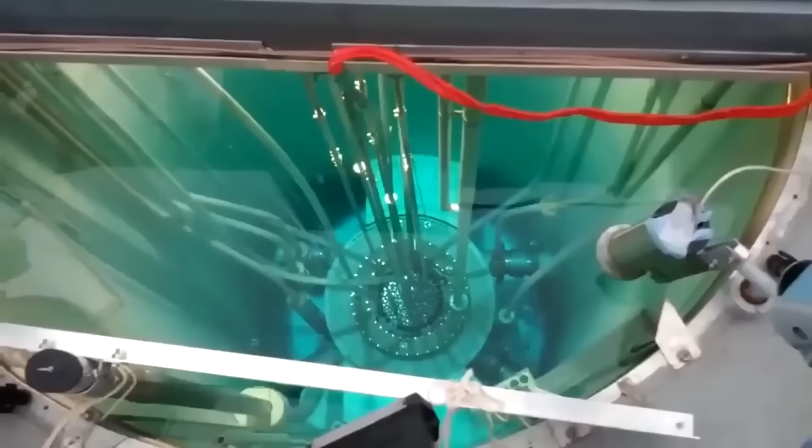Germany, a nation known for its groundbreaking technological feats, is now at the forefront of a nuclear revolution that could completely change the future of our entire planet.

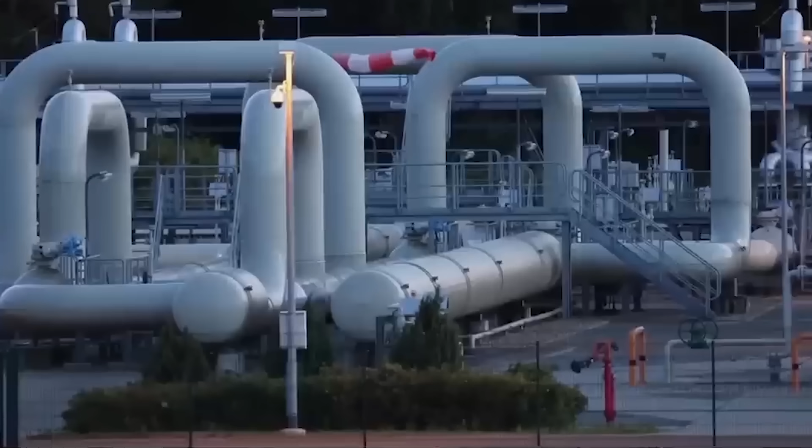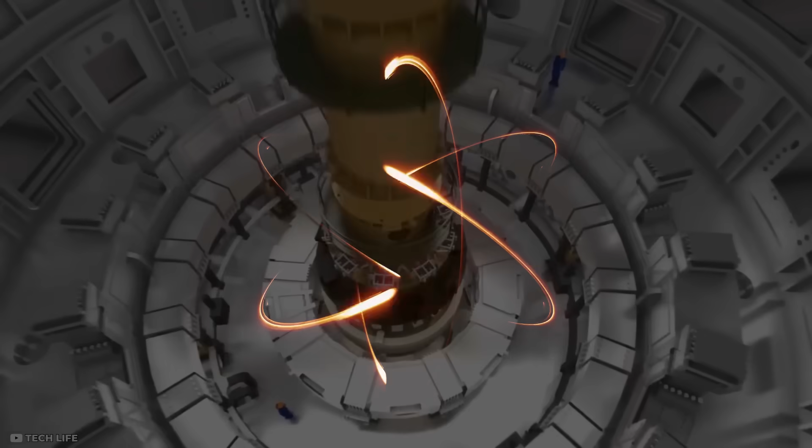The fact that Germany was the first country to abandon nuclear energy has led to an unexpected yet enlightening outcome. The ongoing war in Ukraine and sanctions against cheap Russian gas have pushed the country into a severe energy crisis, posing challenges to the country's economy and calling into question its nuclear phase-out. However, though Germany is phasing out nuclear power, the nation is still leading in nuclear technologies. And now it is witnessing the dawn of next-gen nuclear technologies with its latest Thorium Reactor breakthrough.

Introducing the Dual Fluid Reactor, a groundbreaking new thorium molten salt reactor design that is game-changing for several reasons. While traditional nuclear plants use more than 50-year-old technology based on uranium, the next generation of nuclear reactors is harnessing thorium, an element much more powerful and abundant than uranium. With only 1 ton of thorium, it is possible to generate the same amount of energy as 200 tons of uranium, and a dangerous meltdown is physically impossible.

But what makes this new reactor truly amazing is the fact that it can burn nuclear waste. And by untapping this resource and commercializing nuclear waste, this new thorium molten salt reactor could supply our entire world with clean and safe nuclear energy for up to 1,000 years.

So what is this new reactor all about? How does it work? And what does it mean for the future of our planet? We have everything you need to know covered in this video.

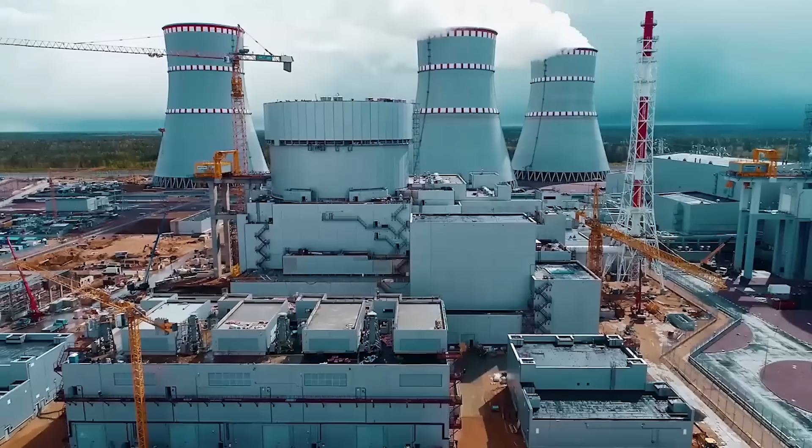Germany was once home to the most powerful and efficient nuclear reactors. However, the risk of a nuclear meltdown, as well as the repository problem of nuclear waste, led the country to shut down its last active reactors.

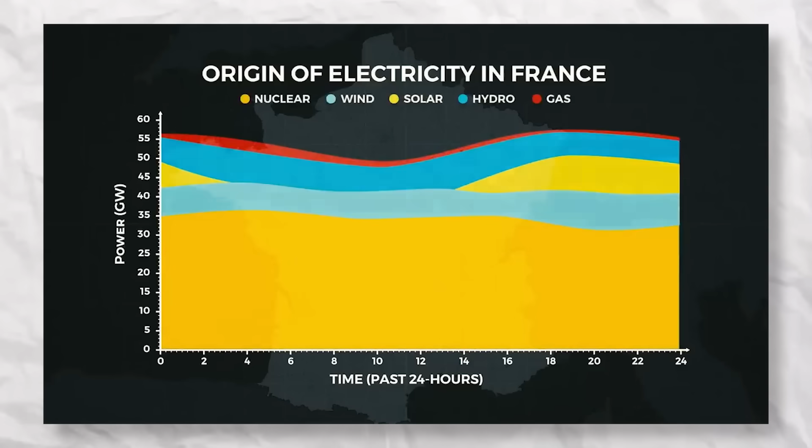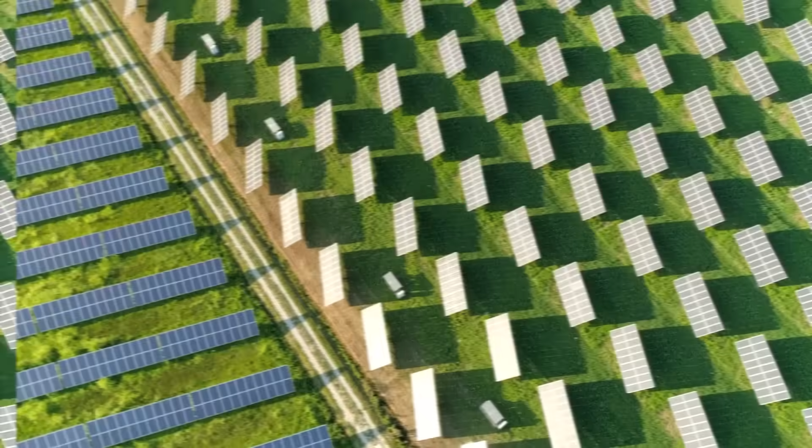But the sanctions against Russian gas, and ironically, the decision of Germany's Green Party, has resulted in the country putting coal-fired power plants, the most polluting fossil fuel source, back into operation. Additionally, Germany now had to rely on energy imports from neighboring countries like France, which generates over 60% of its energy from nuclear power. So while Germany was still dependent on nuclear power, its economy began to crumble due to expensive energy imports. This is a perfect example that a baseload-capable renewable energy grid is not possible with solar and wind alone. Fortunately, the next generation of nuclear reactors are an excellent option for safe and clean nuclear power supply.

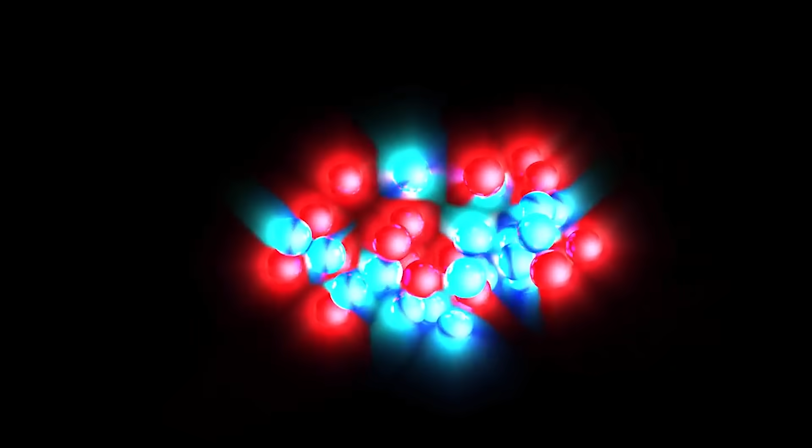So how does the Dual Fluid Reactor work? Traditional nuclear plants work through nuclear fission, where uranium atoms are bombarded with neutrons, causing them to split and release tremendous amounts of energy, leading to a chain reaction in the fission process. Continued release of energy heats water, creating steam that drives turbines to generate electricity.

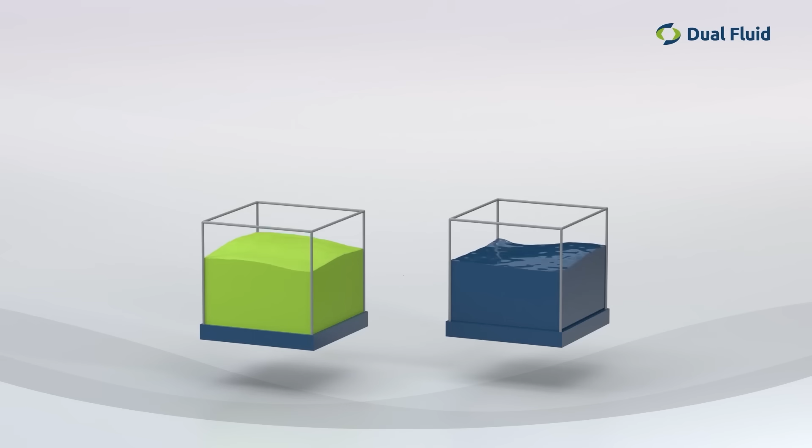But while traditional nuclear plants use solid materials as fuel rods, the fuel is dissolved in a molten salt mixture for use in a dual fluid reactor. Dual fluid means 2 fluids form the plant's core. One contains the fuel, and the other acts as a coolant.

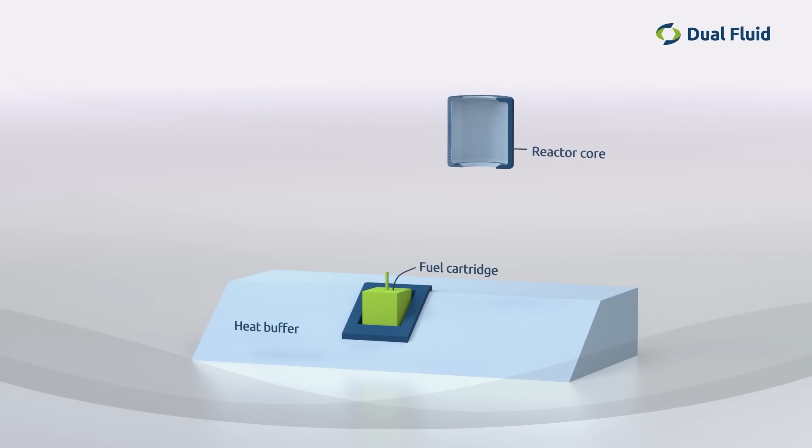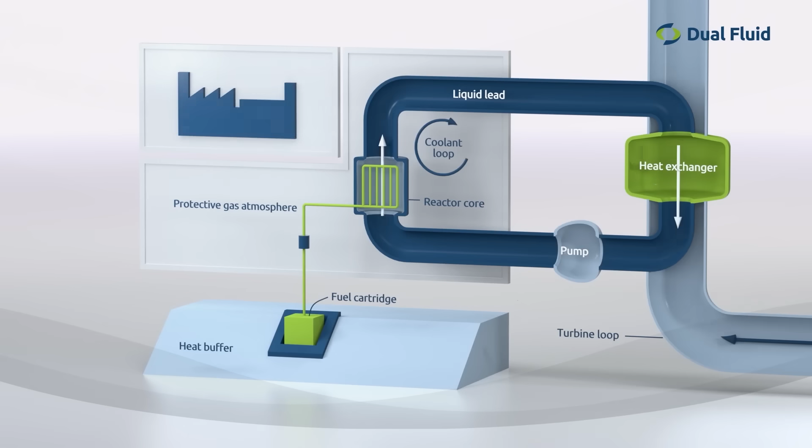Any fissile materials can be used as fuel, from conventional materials like uranium to thorium, and even nuclear waste. The liquefied fuel is delivered to the power station in a sealed cartridge. It is then heated and pumped into the reactor, generating even more energy as the fission process begins. The liquid lead flows in an entirely separate chamber close to the reactor core to extract the heat efficiently. The lead then carries the heat to a separated turbine loop to exchange heat again for the energy generation process.

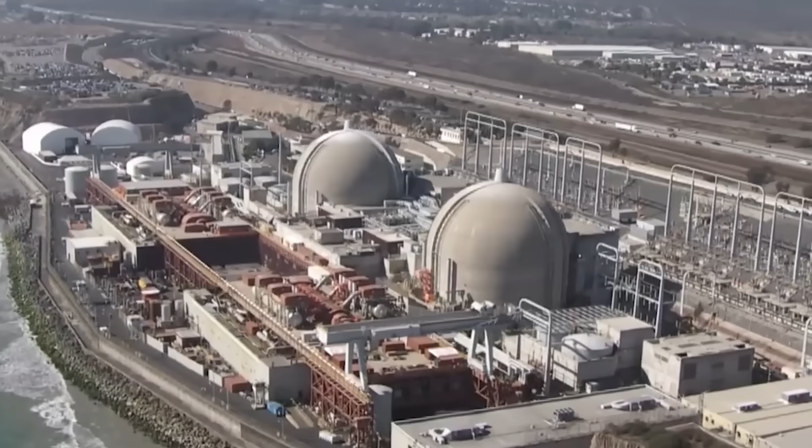So the dual fluid reactor can not only harness thorium, which is 3 to 4 times more abundant than uranium, but it can also turn nuclear waste into electricity, which is groundbreaking for several reasons. The main reason is that current nuclear plants produce high-level nuclear waste, which remains radioactive and hazardous for more than 100,000 years and has to be disposed of properly.

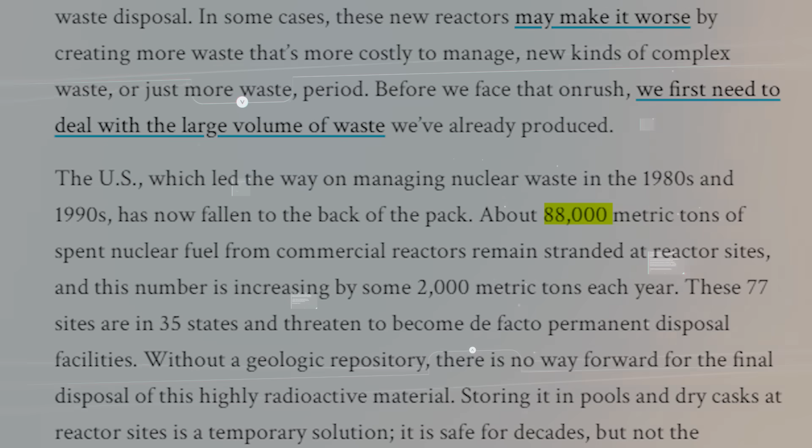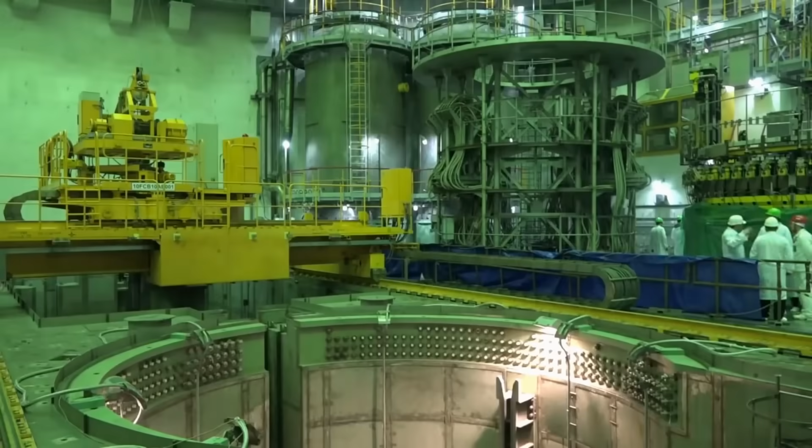In 2023, the United States accumulated about 88,000 metric tons of highly radioactive waste. As there are still no plans for managing and disposing of spent nuclear fuel, the nuclear waste is piling up in those plants, leading to a huge safety problem. However, by utilizing nuclear waste as a resource instead of managing its disposal, this new technology could supply the United States for up to 1,000 years with cheap, clean nuclear energy.

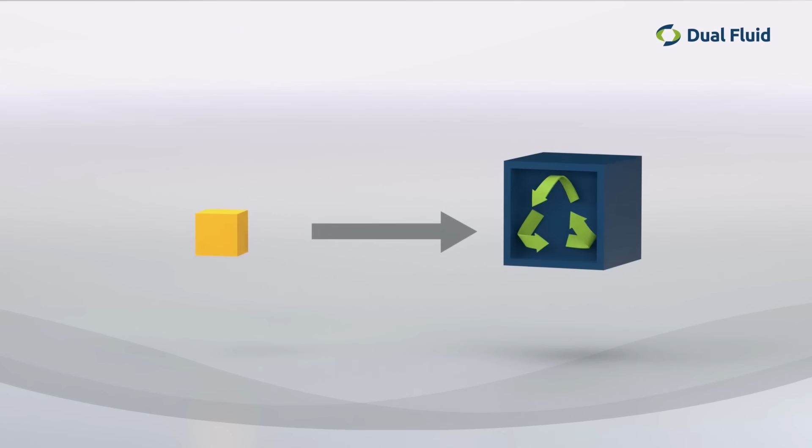And that wasn't even all. According to the company, the liquefied fuel can operate for about 25 years. But at the end of the burning cycle, the spent fuel is transported to a recycling facility, where still fissionable materials are returned to the reactor to be burned again, significantly increasing fuel efficiency. The residual radioactive materials become less harmful than natural uranium in 300 years.

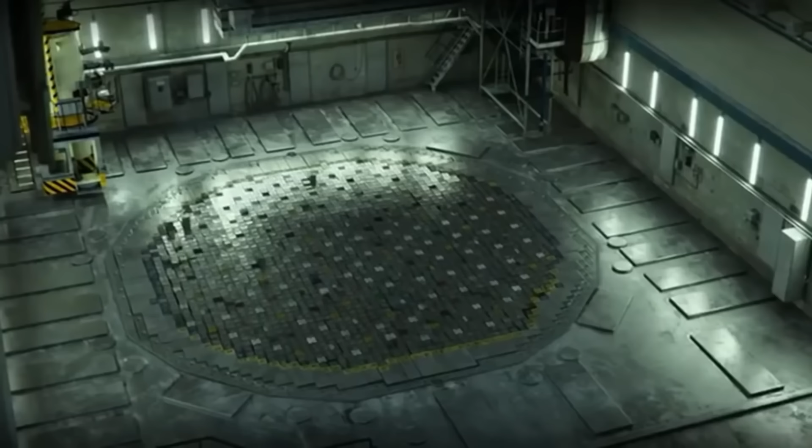Furthermore, the new reactor is considered extremely safe, and catastrophic meltdown situations like Chernobyl and Fukushima are physically impossible. The reactor can never overheat, as the laws of nature work in its favor. If the temperature increases, the liquid fuel expands. As a result, the reactivity of the fission process automatically decreases, creating a self-regulating feedback loop.

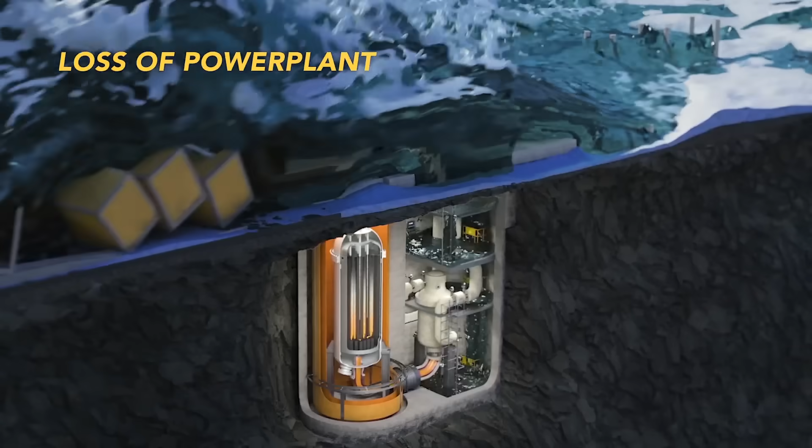An additional safety feature enables using this reactor even in hazardous regions such as earthquake or tsunami areas, typically unsuitable for nuclear power plants. There's a melting fuse plug at the bottom. If the reactor overheats, the plug melts, and the liquid fuel drains into a separate passive cooling tank where the nuclear chain reaction stops immediately.

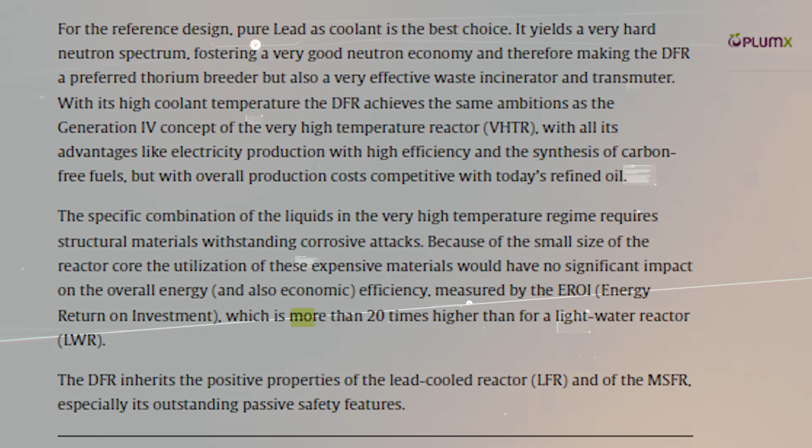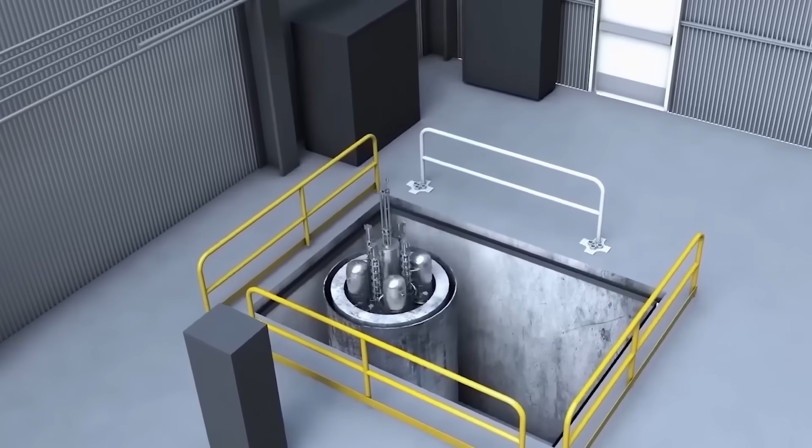According to the company, the Dual Fluid Reactor is incredibly efficient and delivers up to 20 times more energy than current nuclear reactors. Unlike traditional nuclear plants, which can take up huge spaces and take decades to build, the Dual Fluid is also designed as a small modular reactor, making it much more scalable and affordable. Just one of these reactors can power 500,000 homes, while several small reactor cores can be used to replace a large power station. With this new thorium reactor, German engineers have marked a major milestone for the next generation of nuclear technologies.

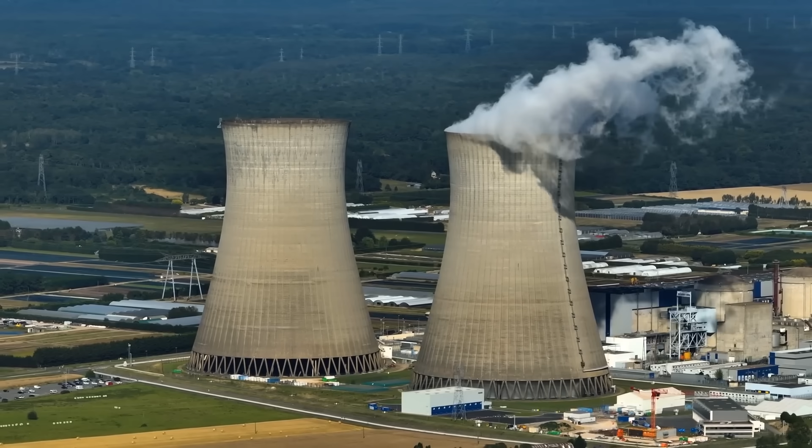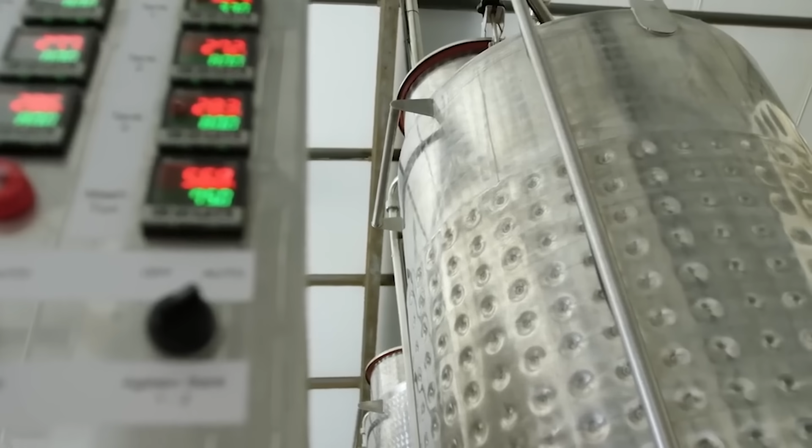I know what you're thinking. It sounds way too good to be true. So what's the catch of the story? Currently, the system is just a concept that has gone through many preliminary studies, but component tests have proven its feasibility. The plan is to develop the first test reactor by 2026. The prototype is scheduled to follow in 2029. And mass production is scheduled to begin by 2034.

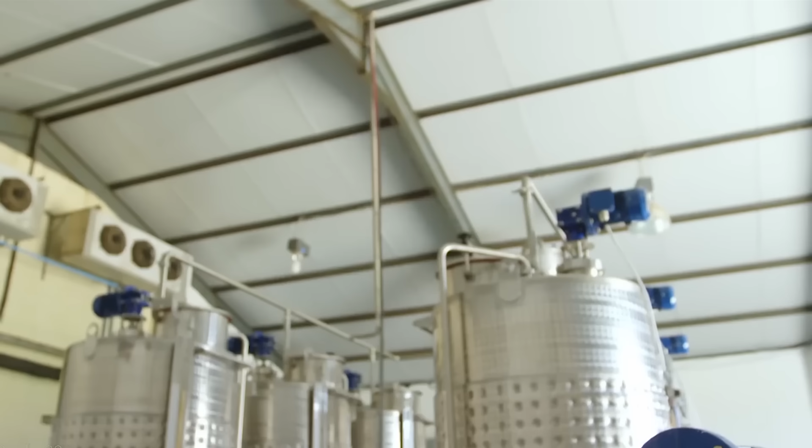So in less than 2 years, we will know whether the system works.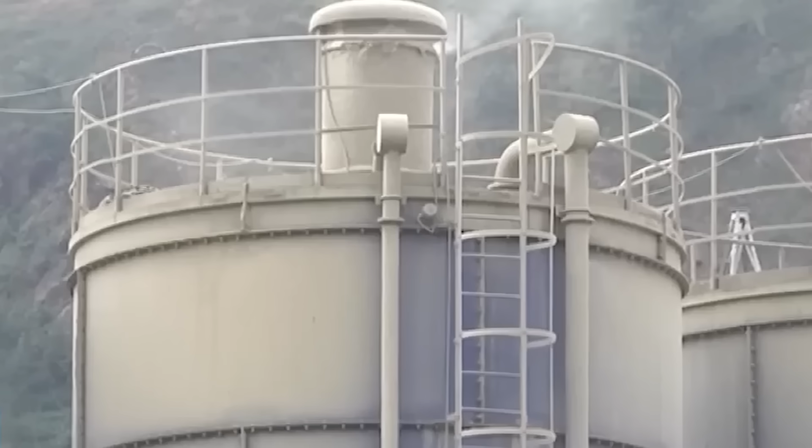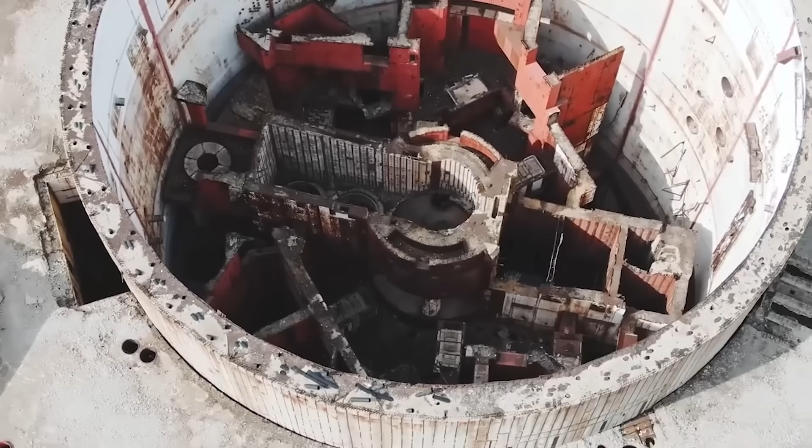Interestingly enough, the first test reactor will not be built in Germany, but in Rwanda. Bureaucratic hurdles and a lack of government funding are hindering the development of such innovations. However, innovations like the Dual Fluid Reactor are inevitable. That's because the importance of clean, carbon-neutral energy is significantly increasing in the global economy, while many existing nuclear power plants are reaching the end of their designed operational life. Updating, maintaining, or decommissioning these aging reactors presents technical, economic, and environmental challenges.

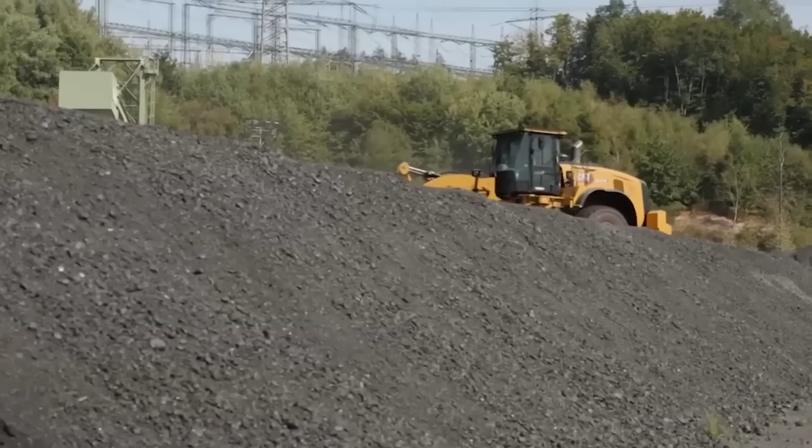Furthermore, conflicts like the Russian-Ukraine war led to a massive surge in energy prices and showcased European nations' reliance on Russian energy. The Dual Fluid Reactor would be a perfect alternative to decouple from Russian gas. It is a carbon-free energy source that is in high demand and a safe and clean alternative to conventional nuclear power plants. The success of this reactor could be revolutionary for the energy industry.

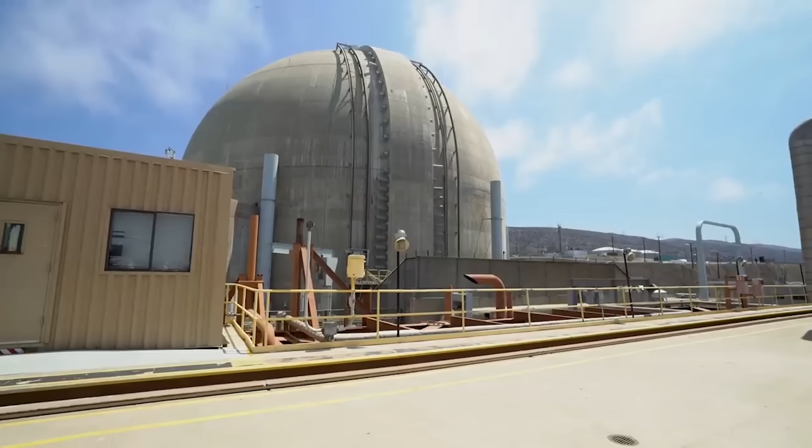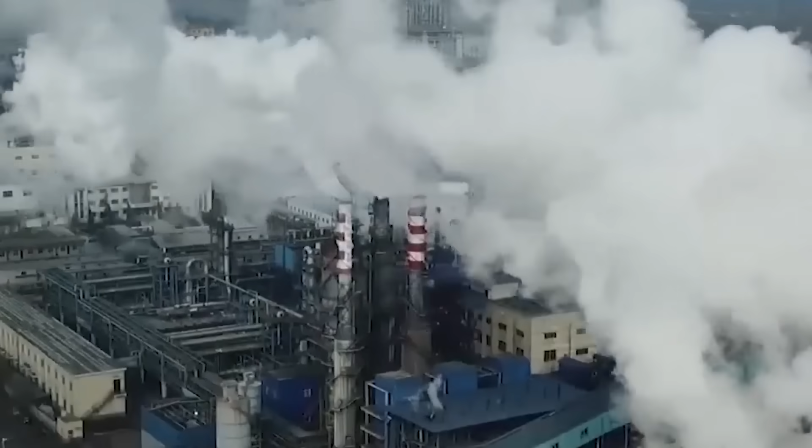But unfortunately, the United States is not supporting the fourth generation of nuclear reactors. Meanwhile, China has already launched its first thorium molten salt reactor, taking the lead in advanced nuclear technologies. Is China leaving the West behind? Click the displayed video if you want to find out more about China's thorium molten salt reactor breakthrough.